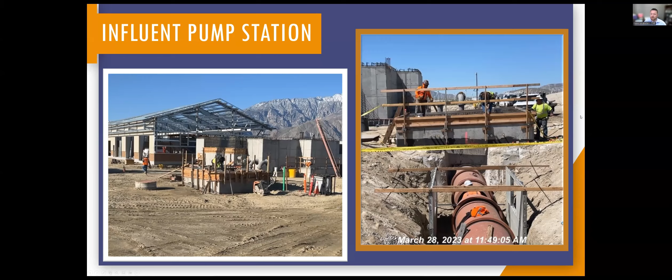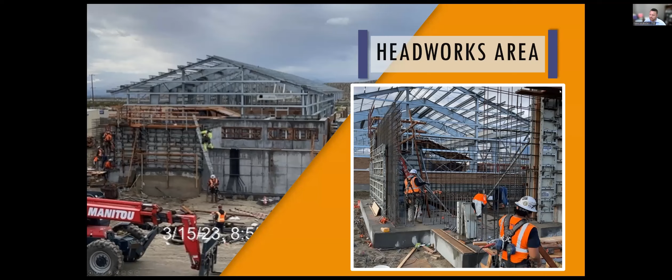In the headworks area, this is where we have the vortex grit cell removal chamber, flow monitoring equipment, and trash racks to remove any debris from the system. Progress has continued on forming walls and completing the knockouts, and the picture in front of you is what it looks like currently, with most of those walls and form work being done. Now the contractor will move forward with completing the remaining portions and installing the equipment for the headworks area.

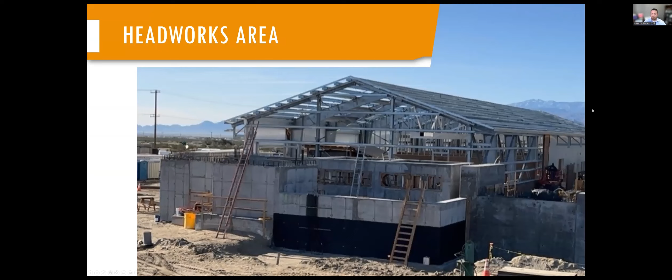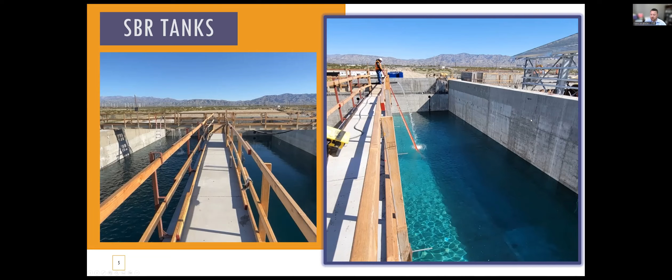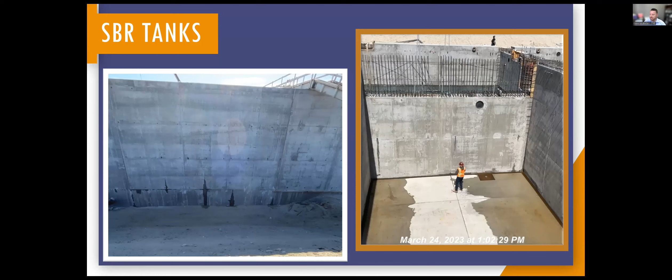Regarding the SBR tanks, all the perimeter walls and interior walls have been formed. The contractor began last month the water testing for the tanks to test for any leakage. In the photo in front of you, a couple of the SBR tanks are being filled with water. Then the inspection team goes around and monitors any areas where there appears to be leaking in any of the cracks or construction joints within the SBR tanks. If any are found, like the photo on the left-hand side, those are repaired and have to pass another leakage test prior to being marked off as approved and ready for use.

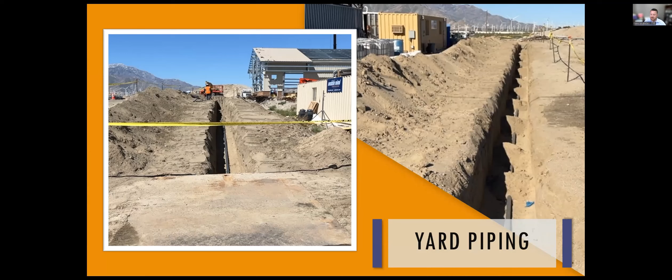The contractor continued on the yard piping. Doesn't seem like a lot, but all things big and small must be constructed on site. What you see in front of you is a 2-inch fire service line that goes through some interior portions of the site. That work was done over the last month.

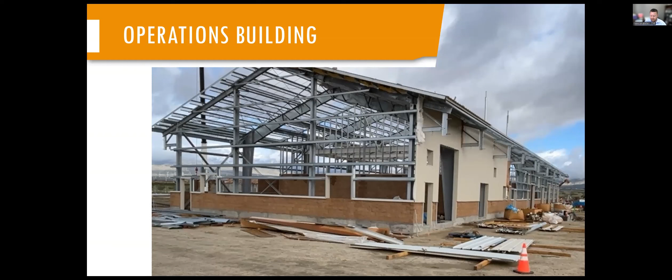In addition, progress on the operations building. You can see a lot of the interior structure has been done and the exterior cladding is starting to go up, with a nice dark brown color for the split face block on the bottom and a tan color on top. This is a look at the entrance to the blower room inside the operations building, and you can see they're working on the exterior and interior cladding throughout.

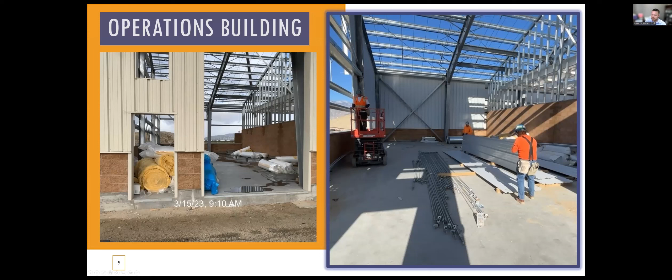This photo is actually from April 6th, so after the month of March, but I thought it showed a good view of what that building is starting to take shape now with all the cladding going on and becoming an enclosed structure. So with that, I'm happy to field any questions on the treatment plants.

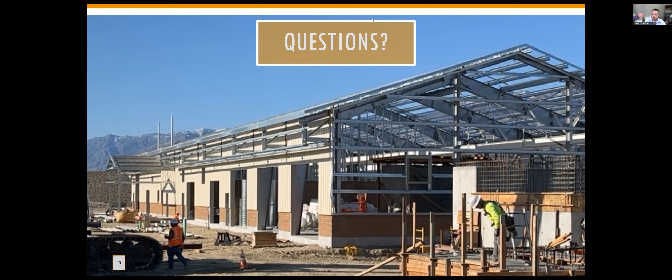Okay, Ivan, any questions? Yeah, just my regular question. How's the timeline looking and any potential hangups or things?

Thank you, Director Sewell. Last we spoke with the state was the week before last, and the state confirmed that they're looking to turn around a bunch of the FBAs, the final budget approvals, this month. So we expect to get that back this month. That gives staff the month of May, basically a couple weeks, to turn around our invoice package and turn that back into the state. It can make its way through the approvals process, and then the check would be issued ideally by July for the first reimbursement with the state. So that's what we've been advised by the state. That's the timeline they've kind of put us on.

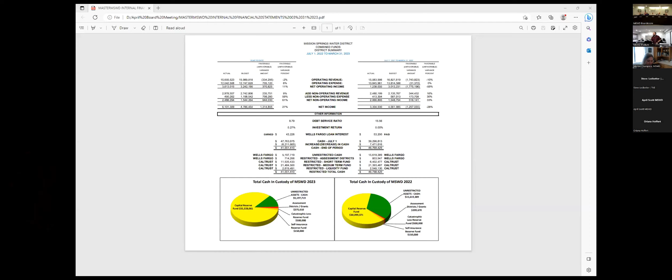I will quickly go over the internal financials summary for the month of March. As you can see, revenue is trending a little bit lower than budget, and it's basically timing when those amounts are coming in, connections to our system, and payments, and operating expenses are within line, ahead by 700,000. Overall, 370,000 in net operating income. As you know, net operating basically means those are the things that we can control as employees, trying to make sure that we're still not out of the water with a lot of things that are happening.

In terms of what COVID did, also non-operating revenue, which again are the ones we don't have any control over, trending ahead of budget by $1 million, and compared to last year, we're ahead as well. In terms of our debt, we are still in good shape in terms of our ratio as required by some of the granting agencies. Investment income return is starting to creep up again with those increases in market interest rates by the Fed. It's still not there because it's still catching up on a lot of our balances that we had to put into some secured investments as opposed to more volatile ones. For the Wells Fargo loan interest, as we were requested to report, the amount earned was 43,000 versus what we paid on that loan, 53,000. So we won't have that issue with being required to pay federal income tax.

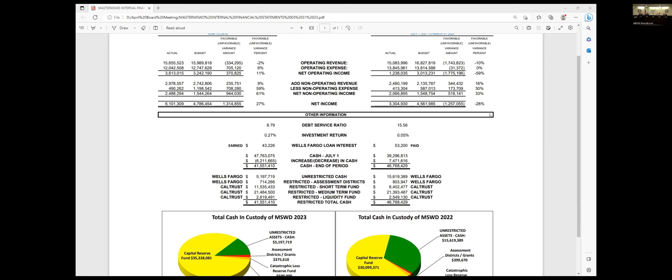There are some penalties or fees associated with shutting the service off that are consistent with our normal policy. But as far as the time spent administering the program and dealing with some of these programs, those are things we'll be looking at, but there's currently no additional cost specifically for those items.

Let me add to that - not just the FOG program, but also the backflow program. A lot of our ordinances haven't been looked at in many, many years. When we were doing the long range financial plan 7 years ago, it was more focused on the long range financial plan and rates.

One of the things Arturo did, which was fantastic, is when we were selecting this particular consultant, we wanted to start back at the policies - what policies do we have in place to make sure they can handle some of these fees and other things we may not be recuperating but should be, especially if somebody's not being compliant. So when we looked at the consultant, Tillis, they presented all that in their RFP response, and that's something they'll be looking at first.

So before we start looking at some of the other bigger ticket items, capital improvements and 20-year master plans, we're going to look at the policies and make sure we're recouping as much money as we can, because if we can recoup those monies early on, they don't have to come out of the general fund or general activities - actually putting it on the people that aren't compliant.

Yeah, I like that. I guess I'm concerned - I don't want us to follow the city's footsteps in having rules that we then don't enforce. Because rules are great, like Abraham Lincoln said, but if you don't enforce them, they mean nothing, right? So I just want to make sure whatever policies we enact, we in tandem enact enforcement actions that go back and forth with that.